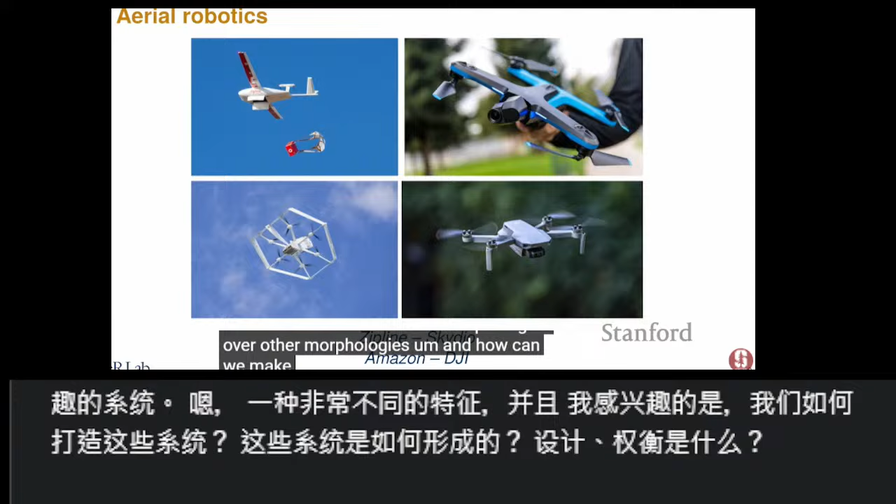A lot of this, of course, comes through, or a lot of the impetus comes from aerial robotics. And we see interesting systems out there that have very different sort of characteristics. What I'm interested in is how do we make these systems? How do these systems come to be? What are the design trade-offs? What are the processes that make us choose certain morphologies over other morphologies? And how can we make this easier for engineers to create interesting systems like this?

So when we're creating such systems, we typically have trade-offs that we are struggling with. So if you want to build an air taxi, you want to be quiet, you want to be autonomous, and you want to be safe, and often these are in tension with one another. So how do you think about creating the systems, and especially how do you create autonomous systems?

Often what we would do as designers is build a system and then pass it on to the next person, and the next person tries to make the system autonomous, design the control loop, etc. What I'm sort of trying to get towards, or at least play with, is how can you simultaneously do mechanical design and controls design in one loop? And especially how do you use, for me, controls theory as a lens towards this? So how do we think about this from a controls theoretic perspective?

My list of slides is long, and what I want to do, hopefully, is talk about two specific challenges, which are sort of problems, and in those problems I want to show three vignettes of different approaches that might solve a particular problem, and then briefly talk about some newer work where we try to close this loop.

And these first two sections will be mostly designs that sprung from some sort of place of inspiration from a designer, and what we want to get away from is having this reliance on the designer's creativity, but something that can automate this.

I don't really know the culture here, but if you have questions, feel free to interrupt me. That's totally fine from my perspective.

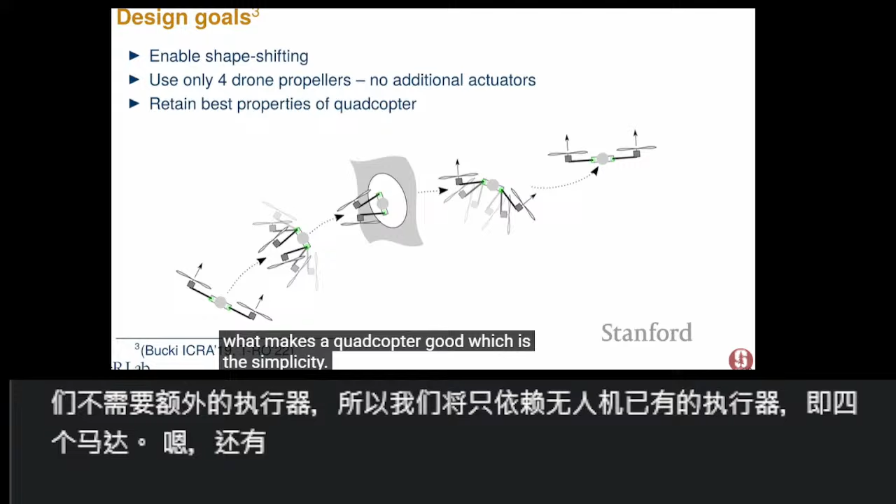The way we ended up doing this, the second iteration, the nicer design, looks like this. We have 4 arms, each with a thruster at the end. The propeller has a hinge that allows it to fold 90 degrees up or down, with a mechanical stop on each end. The propellers are bidirectional, so if you anchored the body, the propeller pushing up would extend the arm.

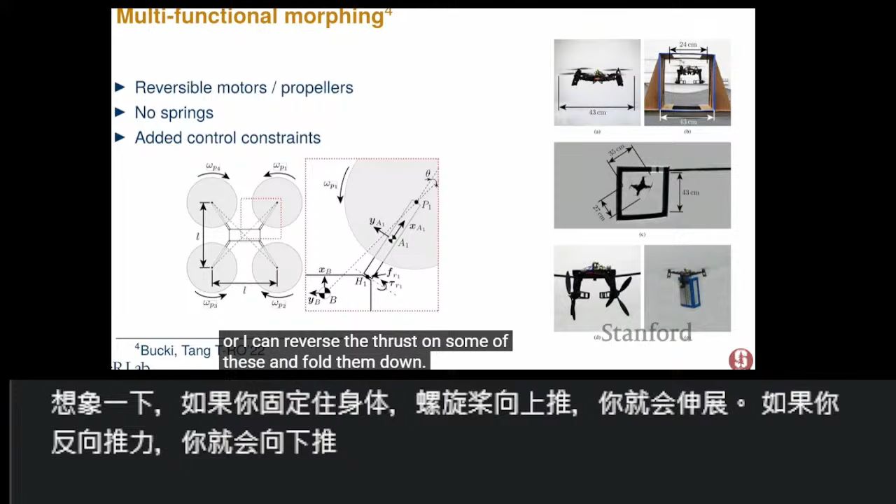If you reverse thrust, you'll push down. In flight it's more complicated because there's no anchoring, but fundamentally I can have all 4 motors deployed straight and fly like a quadcopter, or reverse the thrust on some of them and fold them down. This gives us a system with interesting capabilities.

Here we see the drone take off, fly like a quadcopter, and then fly through this narrow tunnel in this shape-shifted configuration.

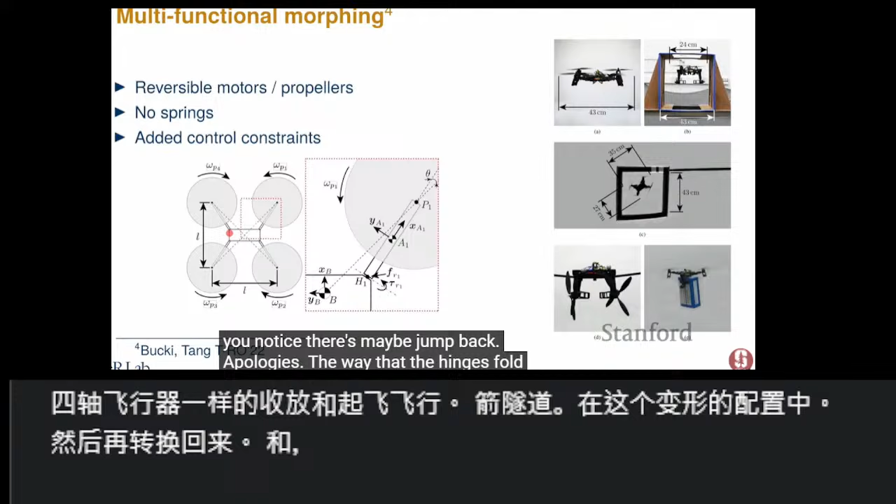And then transition back. You'll notice, apologies, let me jump back. The way the hinges fold is not quite aligned, and this is so that you still have yaw authority, which gives us the ability to hover the system in this reverse configuration.

It is horrendously inefficient in the folded configuration, you wouldn't want to do this for a long time. On one hand, the disk area is much smaller, half the size, so that's a much higher power configuration. But also the yaw torque needed is actually quite high, and the propellers are very inefficient in reverse.

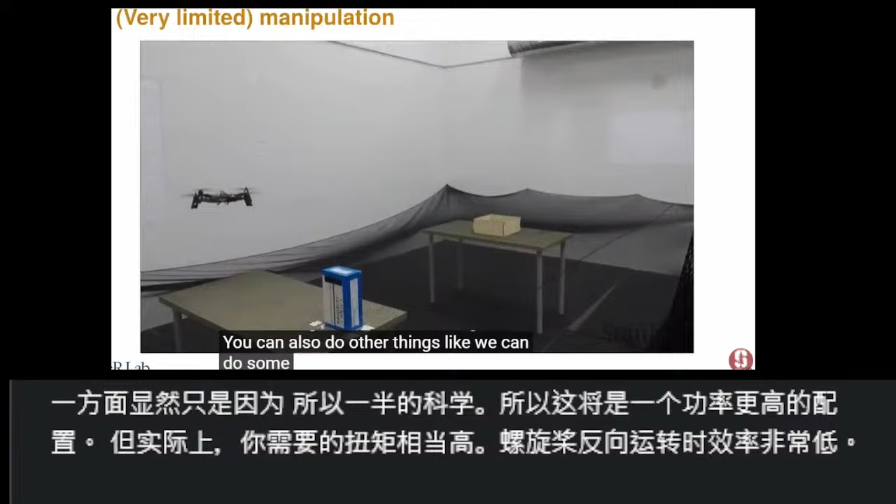But you can do things like these flights, and you can also do other things, like some very limited manipulation. Full disclosure, the box has to be empty because we don't have enough grip nor thrust to carry anything bigger. This is obviously not the design point. We just discovered this sort of by accident.

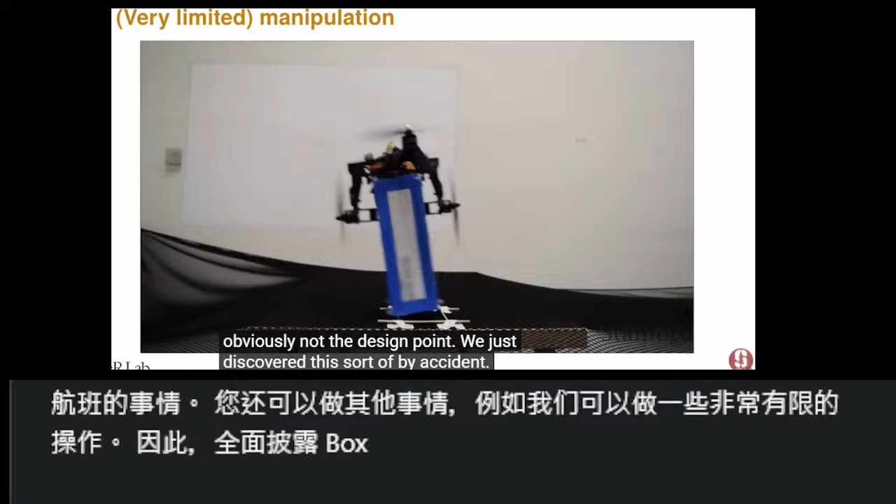But you can use this mechanism for other interesting things. So you can use this to, say, pick up this box, and then you'll notice our position control is not nearly as good when we're carrying the box, but then we can do some very limited manipulation.

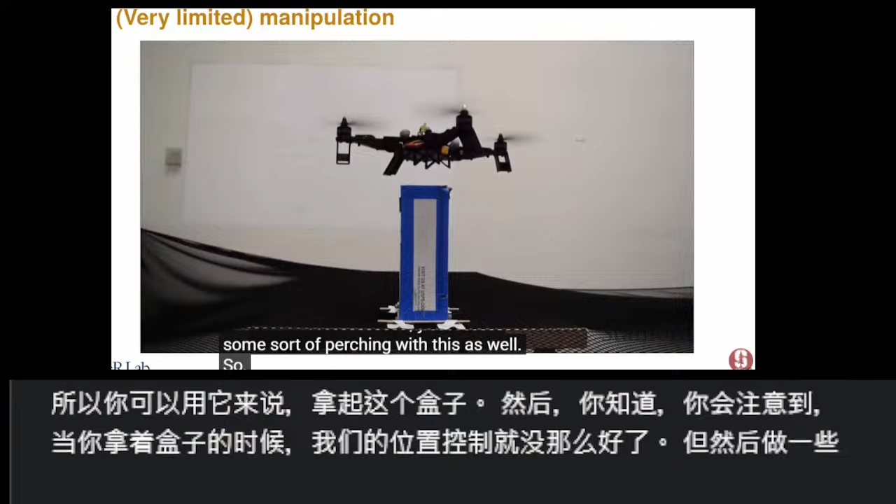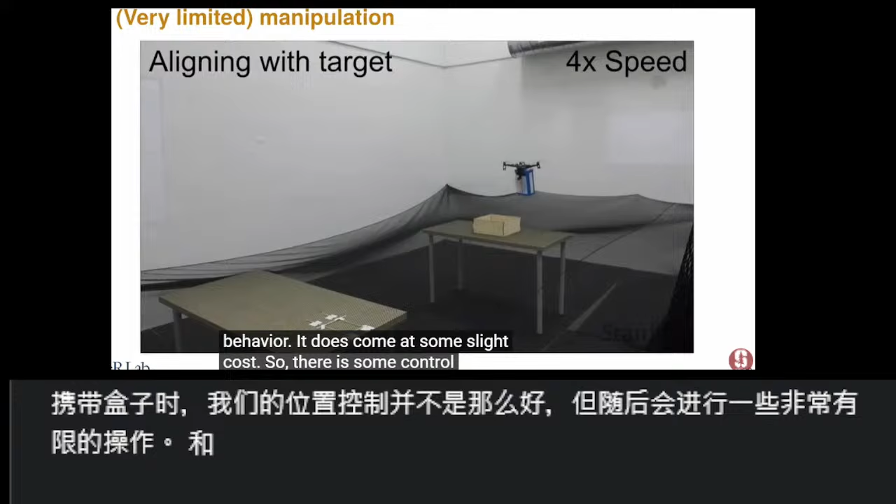You can also do some sort of perching with this as well. So if you land on a wire, and I sadly don't have a video, the four arms fall down and that moves the center of mass below the contact point, so you have a sort of very natural perching behavior. It does come at some slight cost, so there is some control logic you want to be careful about regarding thrust limits, so you don't accidentally fold the system, but that effectively just moves your minimum thrust up slightly.

Okay, so that's morphing, and then the third thing to operate in a dense environment is to cheat and just sort of embrace collisions. So here we were interested, inspired by the DARPA Subterranean Challenge, in creating systems that can really just operate without any sort of knowledge of the environment, so no interest in avoiding collisions necessarily.

This is a tensegrity shape, and I was very happy to see there's a tensegrity sculpture just outside here. A tensegrity shape is something where you have some rigid rods enmeshed in a series of tension elements. What's nice about these structures, as an engineer or a sculptor, they just look cool, but as an engineer, what's nice about these is if you apply an external load, it is distributed internally either as tension in the strings or as compression in the bars, and both of these can be very strong modes.

This is as opposed to a classical quadcopter with an arm - if you hit the end of the arm, there's a big bending moment at the shoulder, which is where you'd have a failure. So what we did is we built a quadcopter in a 6-bar tensegrity that allows us to do very large collisions. We don't need to know anything about the world - we can just sort of crash our way through it.

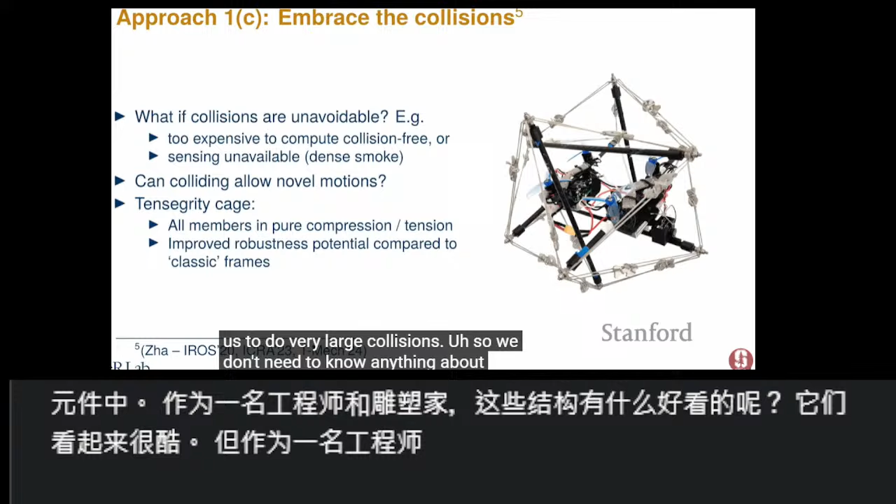To design this, there's all sorts of analysis. This was sort of a cartoon FEM system we created so we could do collisions and try to understand just how the forces would be distributed, to size the robot. But the end result is a system that looks like this.

This is a robot on Berkeley campus. We're not allowed to fly, so this is hopping for the lawyers. This is the robot - its task is to just move forward. It has no external sensors, it just has its IMU, and its task is to move forward through the world. It has no information that it's on a ledge.

So what you'll see here is the robot take off, and then it falls down because it doesn't know where the ground is. It is approximately spherical, so we can use the motor thrusts to orient ourselves more or less upright, and then we can keep moving. We've bashed this thing into our lab concrete wall at like 7 meters per second fairly reliably. At 10 meters per second you can do it a few times, and then eventually something will break. But it's a very robust system.

And what you can also do is motion - this is a robot tasked with moving from this side of the tree to the other side of the tree, again only using its accelerometer and rate gyroscope. It has no information about the world, and what we'll see is it'll crash into the tree. Of course, we can detect a collision with the accelerometer, and we do these hops.

The reason we do the hops is this allows us to do dead reckoning with a fair amount of precision using only the IMU. The logic here is very simple - if you collide with something, hop to the left a meter and then try to go back to where you want it to go. But I want to show here, it's kind of impressive that you can get pretty good dead reckoning from this. And the key here really is the hopping.

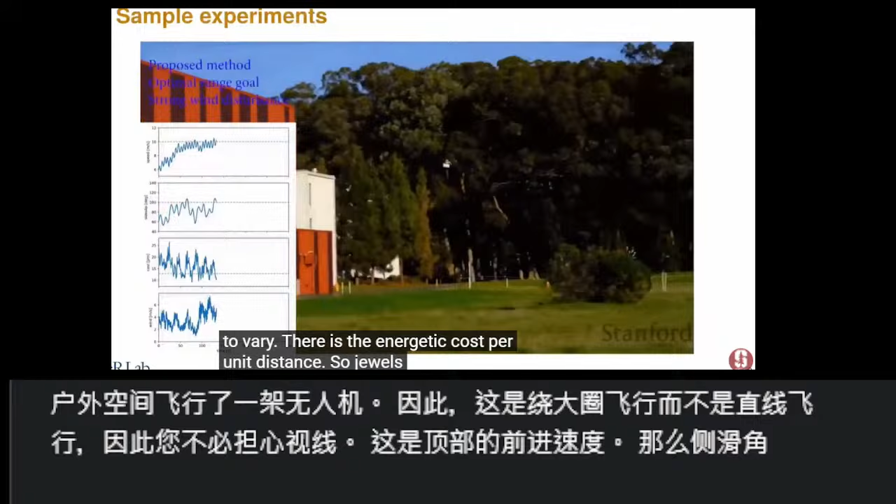We have a graph here that's the forward speed at the top, then the side slip angle, so the 2 degrees of freedom that we get to vary. There is the energetic cost per unit distance, so joules per meter. And then the bottom is just the local wind as we measure it from a base station on the ground.

And what we see here is the speed and the side slip. These dotted lines are things that we just did some offline characterization, and these are approximately where we think the optimal are, but they do converge to this.

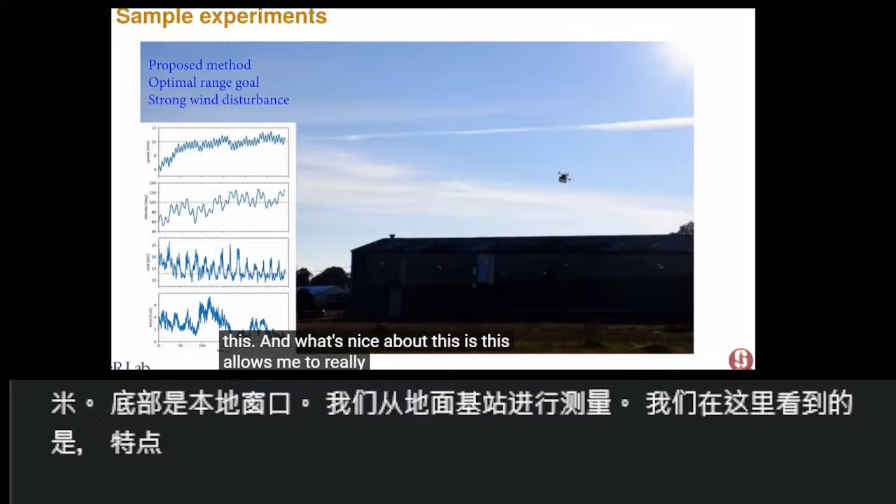And what's nice about this is this allows me to really converge with no other information. I don't need to know anything about the payload. If you give me a different payload today than yesterday, this should also be able to converge.

Then, as I said, we were worried about speed, so we did some adaptation, some modification of this algorithm. Specifically, we as researchers in the 21st century have done a lot of work on stochastic optimization. Some of those ideas you can apply to the extremum seeking controller to make it converge faster. So we played around with that, but the details are probably not so important here. But again, this is just being smarter, right? Taking your system and playing with the algorithms to get more out of the system.

Then again, my heart beats for weird mechanisms. We made a weird mechanism for morphing the system. So if you take a drone, a quadcopter, and you try to fly at high speed, you end up with something that looks like this.

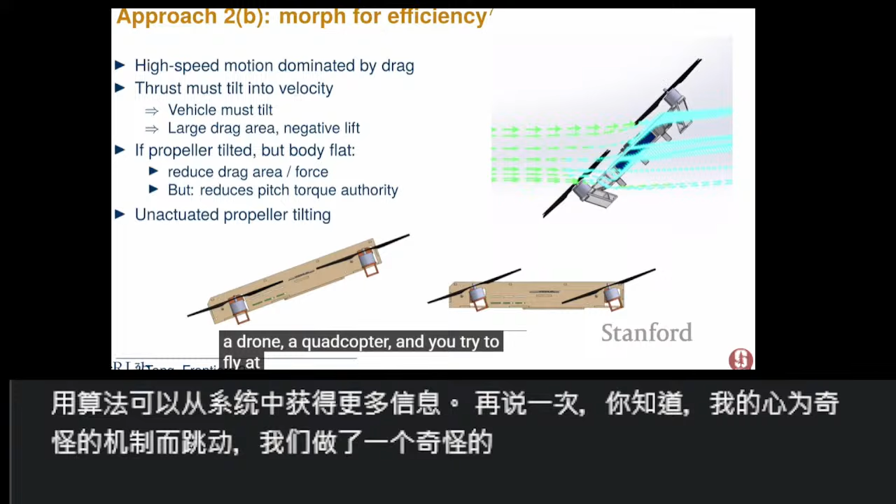So this is very cartoon level CFD. But you have the drone, you have to produce your thrust forward, and then you have the drag of the system that you need to overcome. As you try to fly faster, you're basically increasing that surface area, so you have more drag, which means much less efficiency.

And ironically, the system tends to act like a wing pointing downwards, so you actually have negative lift that you also need to compensate. So if I could tilt the propellers without tilting the body, I could get the forward thrust without this additional drag. So we worked on a system where I can tilt the propellers, but again, do this without actuation.

So I only want to use the 4 motors. The 4 motors I have to have anyway, but get the system that can operate in these 2 different configurations.

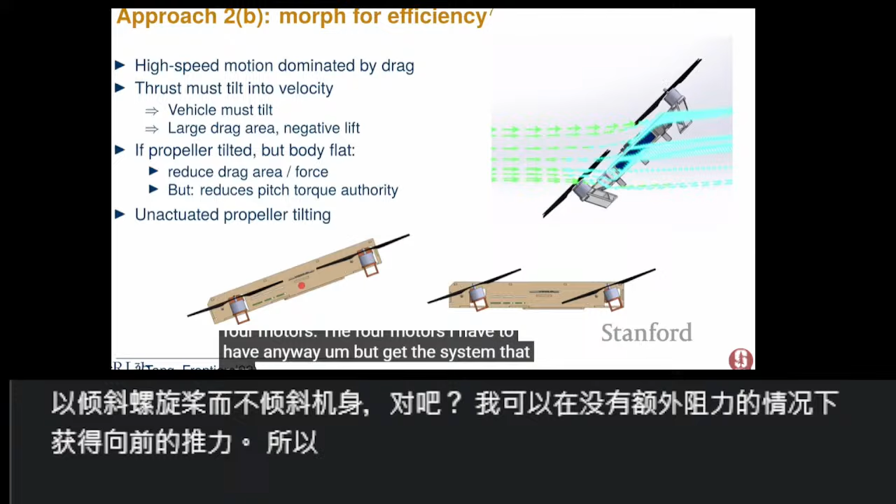The way we did this is with a sprung mechanism where all 4 of the propellers have 1 internal degree of freedom, so they all move together. There is an internal hinge and a spring attaching the propeller to the body.

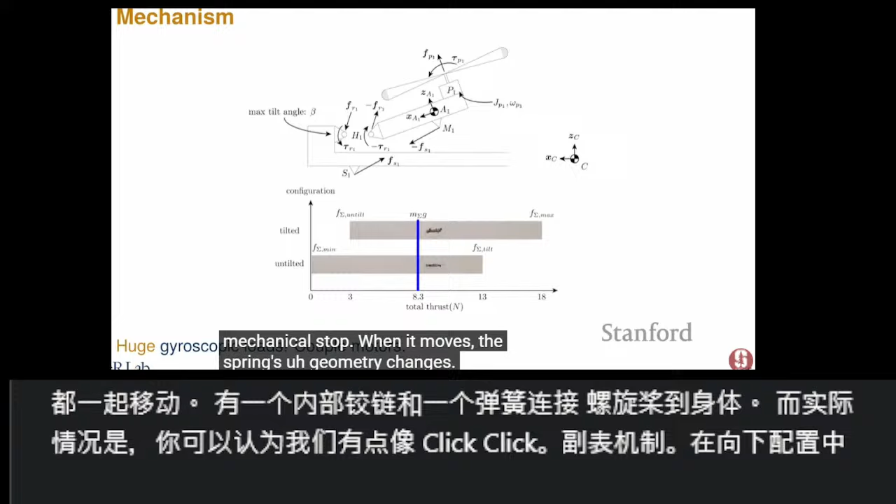And what happens is, you can think of it as a click-click bistable mechanism where in the downward configuration, there is a certain maximum amount of thrust where you would overcome the spring's restoring force. You would have this thing buckle up. It will hit some mechanical stop. When it moves, the spring's geometry changes, so that restoring force changes. And then to get it to go back, you need a much lower minimum force.

So what this gives us is this graph here, showing with the 2 configurations, tilted forward versus perpendicular untilted configuration, the thrust I can produce without tilting. If I'm in the untilted configuration, I can produce down to 0 thrust, of course, and then there's a maximum thrust beyond which this thing will tilt. Once I have reached the tilted configuration, I have the top range of feasible thrust forces, and if I exceed this minimum force, then I will tilt or switch back to the original configuration.

And what's nice about this is we can hover in either configuration. So the blue solid line here is the hover thrust, so you can have this vehicle hover in either configuration. What does this look like? This is the vehicle flying outdoors. Doing that switch here is in our lab, doing this switch.

Of course, not particularly useful if all you're trying to do is hover, but just for motivation, the untilted configuration is nice. Why not always tilt? The untilted configuration is good because you have larger moment arms. So at low speeds, you are more maneuverable with perpendicular propellers, but of course, you just have higher drag. But what this gives us is much higher maximum speed, for example.

So here we have the system with the tilted configuration on the right and the untilted configuration on the left, and we can achieve sort of a 12% faster flight. I forget what the efficiency number is at the same speed. You can also show something like 10-15% decrease in energy that you require while flying.

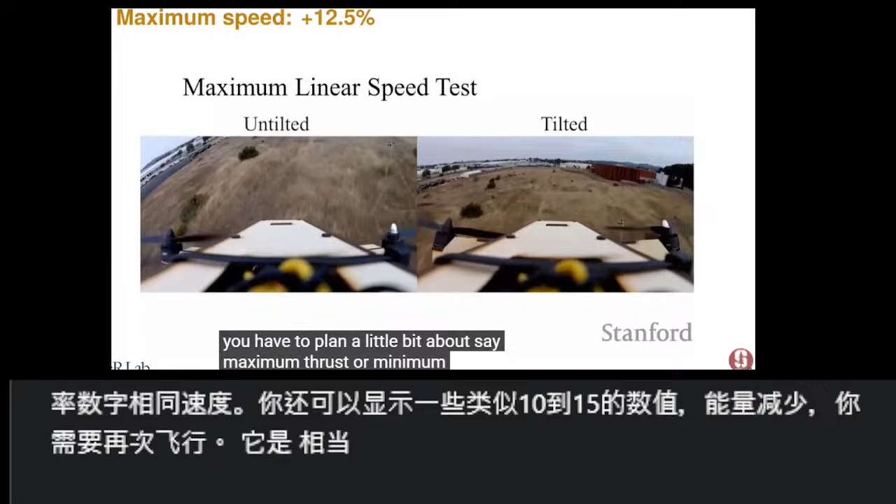Again, it's not quite for free because there is some thrust limit you have now. So when you are flying, you have to plan a little bit about, say, maximum thrust or minimum thrust so you don't accidentally switch configuration between these two configurations.

And then lastly, on this topic of efficiency, how can we cheat the problem? So again, I want to fly a long time. Let's just think about changing the problem so that this is easy to do.

So if you think about this powertrain that I've described, if you think about how the propellers interact with the air, a simple model of this is what's called the actuator disk model. This is almost cartoonishly naive. When you first learn about it, you model the propeller as sort of this magic disk that just adds energy to the flow. Nothing is rotating, but it's surprisingly predictive.

And if you do the math for this, you come up with this power relationship. So the power that I require for a propeller will be proportional to the force to the power 1.5, and inversely proportional to the radius of the propeller. This is for a stationary propeller, but this gives me a predictive way to guesstimate how the power requirement will change if you change the mass, or if you change the size. This gives you some idea of how to do this.

And from this, of course, you learn that, okay, if I want to do long duration flights, I either want to have a lot of energy or low power. I can reduce the power by increasing the size of the propellers or reducing the amount of force I need per propeller. I can also, of course, change the amount of energy I store.

So this graph here says, okay, let's take a drone, say it has unit mass without battery, and then change the amount of battery that I carry. Cartoonishly, I'm going to allow it to carry an arbitrary amount of battery. So on the x-axis, we see the battery or the total mass with unit 1 mass, meaning 0 additional battery, and then more and more battery. And on the y-axis, we have the flight time that this thing can fly.

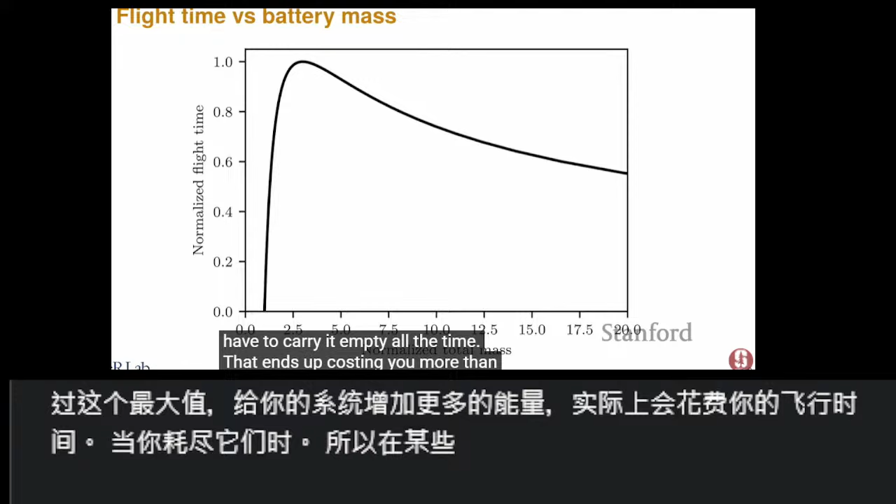And of course, if I have no battery, I can't fly. Not surprising. As I have more and more battery, I can fly longer and longer. And then there's some maximum beyond which adding more energy to your system actually costs you flight time. Why is this? Well, loosely because batteries don't get lighter as you deplete them. So at some point, the cost of carrying that additional energy, you have to carry it empty all the time. That ends up costing you more than it gains. So there's some fundamental limit to how long you can fly, no matter how efficiently you design your system.

And that's unless you cheat. So the way we cheated is with what we called flying batteries. The idea is I have my main system that I want to have do something useful, and then I have a small system that just brings it more energy, right? And what this gives me is a robot that can fly potentially arbitrarily long.

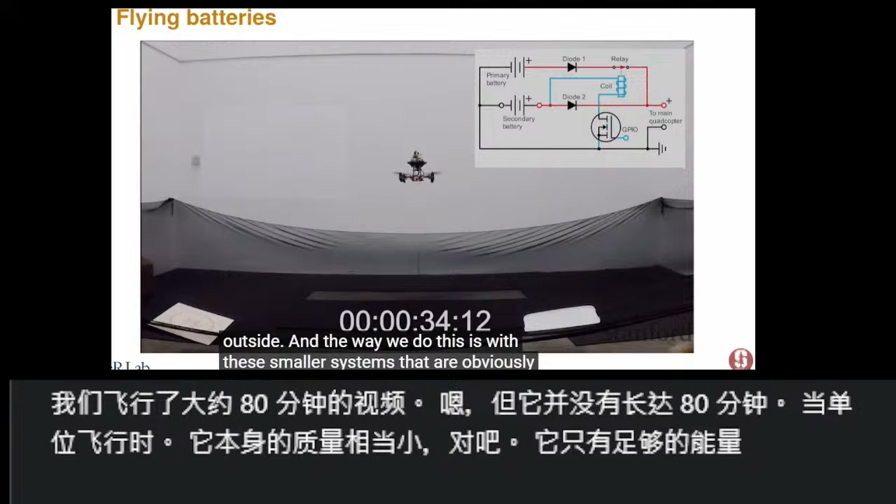So I'm going to show you here a video where we flew for around 80 minutes. It's not 80 minutes long though, where we can have this main unit fly. It has itself a fairly low mass, right? It only has enough energy for effectively taking off and landing, but we can bring additional energy to it from outside. The way we do this is with these smaller systems that are obviously carrying a much larger battery than they themselves need. And then, up here, there's some circuitry to make sure you don't set fire to the drone and so on as you connect these batteries.

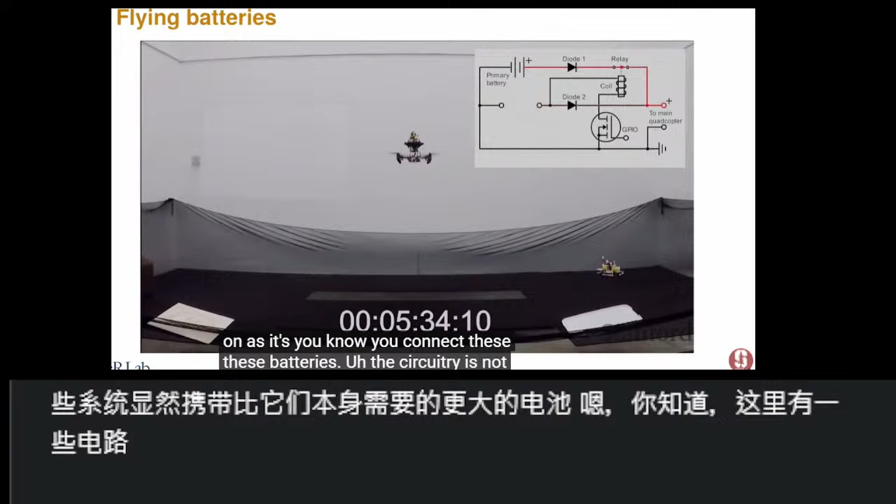The circuitry is not that sophisticated. It's effectively some diodes, which just mean one-way current flow. But here you see this maneuver where we then have the battery come in and out. And what we can now do is we can fly effectively indefinitely with the main system.

And if you're doing something like an air taxi, this might be one way to get around the problem of how do I make a system that is light enough and small enough that it can land safely in crowded environments, but still have useful range. Well, just bring the range as you're moving, right? So you don't need to carry everything with you.

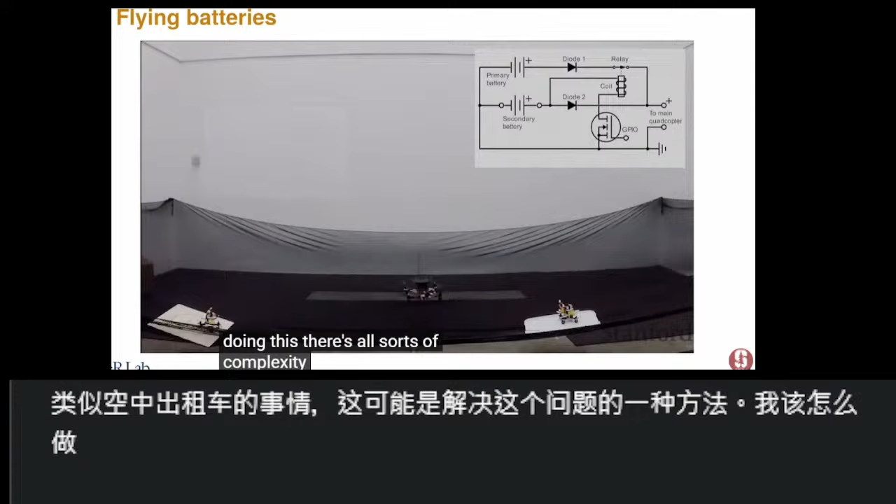So with all of this, how do we go about automating this design process? Each of these problems I've shown you, these different approaches, effectively come from some spark of inspiration, right? You have some idea of why don't we try folding the arms or something like this. And how do I automate this problem? How do I go about giving a designer a tool where maybe you do more of a high-level sketch of the problem and it then gives you some possible designs?

I think we'll never get to the point of automatic design, because at the end of the day the design space is always too complex and our value functions are always too vague that you can never meaningfully automate the whole system. But what I'd like to have is something that gives me a rough idea that's in the feasible space, that is then for me to interrogate. So I can take this and play with it and see how well it might fit my particular problem. So I want to talk about three ideas, depending on time, about how this plays out. Now, we've done nothing in terms of solving the actual problem, but sort of go in this direction.

The first will be on designing a closed loop, or doing closed loop co-design, then learning from simulation, and lastly, synthesizing interpretable policies which, if you'll humor me, hopefully fit into this bigger problem.

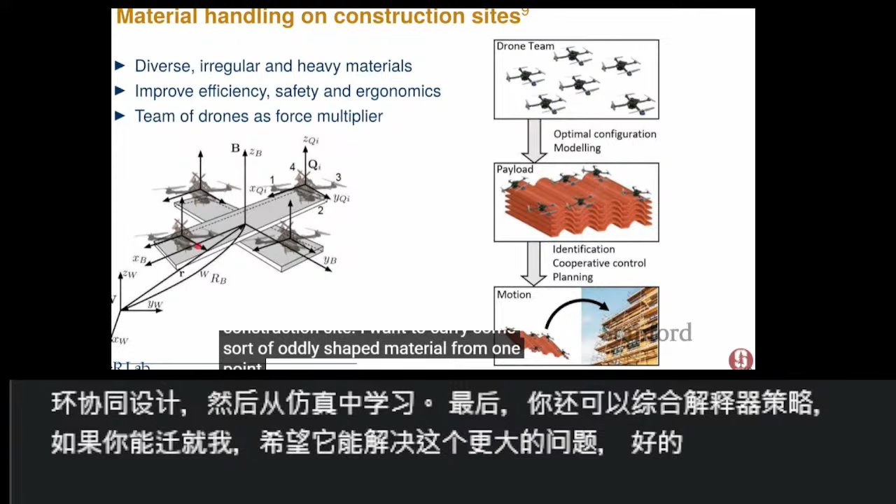Okay, so the closed loop co-design is motivated by a fairly mundane material handling problem. Maybe I'm on a construction site, I want to carry some oddly shaped material from one point to another on this site. I'm going to assume I have access to a bunch of lifting units, drones effectively, that I can somehow attach to the material I want to carry. And then I want these things to bring my material somewhere that I want to go. And of course these are drones, so I can't replace the crane because I can't pick up really heavy things, but I can potentially help by moving some lighter things from point A to point B.

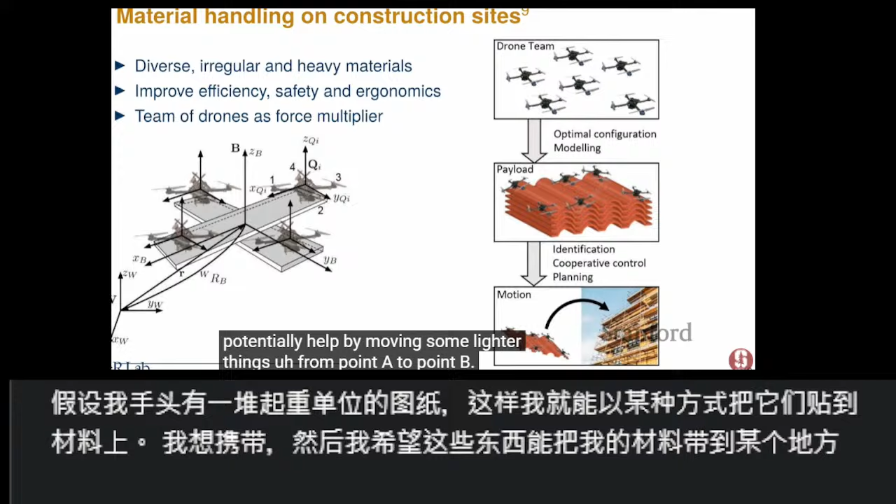Now, if I am doing this, we're going to assume that the payload I'm moving, I know its characteristics - I know the geometry of the payload, I know its mass characteristics, and I am able to attach my lifting units somewhere on the perimeter of the object. And what I'm going to search for is where should I attach these lifting units on this object so that I have robust performance. Robust performance for us, I'll define in a second, but just loosely: if I want to carry this particular weird box, where should I put these things so it gets there even when there are disturbances?

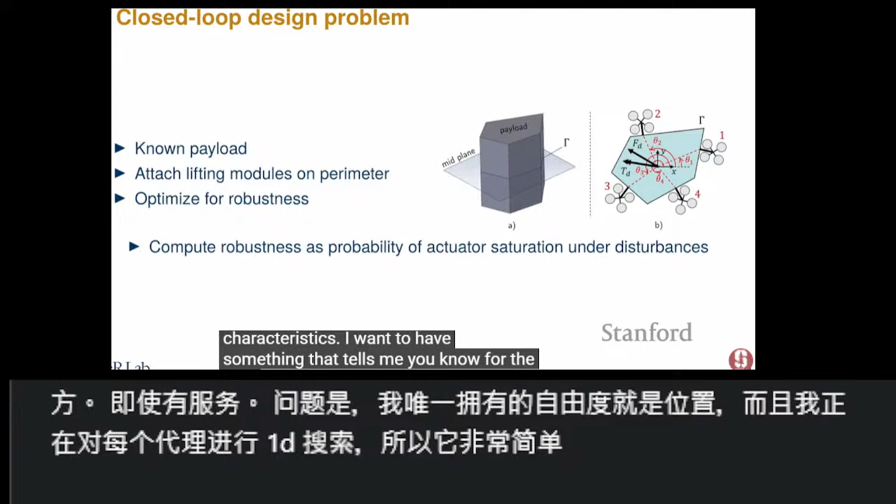It's sort of a cartoon of a drone design problem where the only thing I have, the degrees of freedom I'm playing with, is the location, and I'm doing this on a 1D search for each agent, so it's a very simplified controls problem. But I want to do this in closed loop, so I don't want to design some open loop characteristics - I want to have something that tells me, for the best controller, this is the best performance you're going to get.

Our control objective we frame as follows: we say that a robust system will be one that has least probability of actuator saturation. So you can imagine as there are disturbances, your thrust forces will vary, and I want to keep those thrust forces as far away as possible - I want to reduce the likelihood of them hitting either the minimum or the maximum bound. The thrust force I have in closed loop, of course, consists of two things: there's the static feed-forward term, just the hover thrust that I require to keep this thing flying, and then there's the feedback term, which is in response to disturbances.

So what we do is we model our system and linearize it, and we assume that the disturbances are Gaussian. The disturbances here are force and torque disturbances acting on the system. Then we do an H2 approach to calculate the statistics of the inputs. Then we calculate this Mahalanobis distance, which is a bit of a kludge, to approximate the amount of probability mass that we have within the feasible range.

So we're not actually solving the problem exactly, notice how I'm breaking it into approximations. But using this, we can calculate for certain configurations, at least with this Mahalanobis distance, what is the smallest number of standard deviations in the multidimensional sense that I am away from a saturation of my actuators. As you have different designs, you can calculate this. This is fairly cheap to calculate, not milliseconds, but we can solve it in seconds for a configuration.

And it's offline, so you're not doing this in flight. Seconds is fine, but we've not optimized it beyond that. You can then figure out where is the optimal configuration.

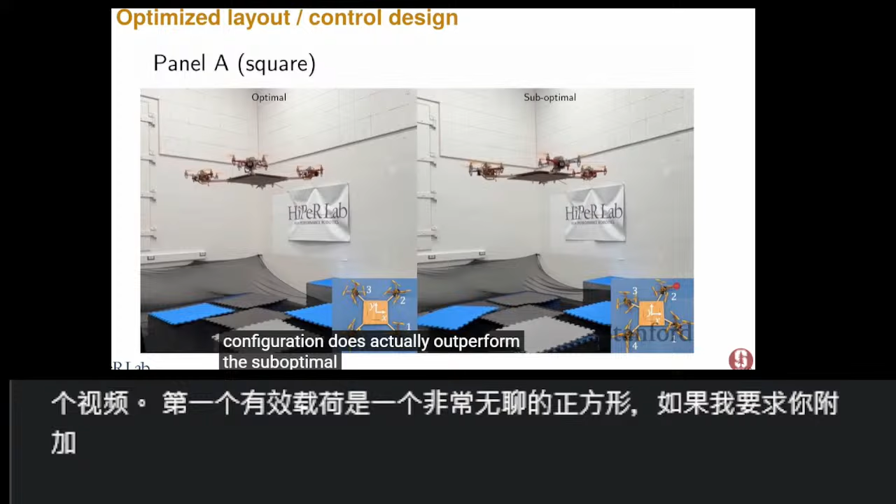This video is just supposed to show, we predict some difference in performance, and we can measure that difference in performance as well. The optimal configuration does actually outperform the suboptimal configuration, even when it's, in this case, probably not particularly useful to have heavy machinery to solve this problem.

But we also had this payload here, which I think is more interesting. This payload looks more or less like an L. We are going to attach three agents to it. If you had asked me, I would have guessed this configuration on the right, the symmetric configuration.

But if you run our tool, it spits out the configuration on the left. It is a locally optimal configuration. This problem certainly is not convex—you can imagine you have permutations, so there's no unique solution anyway. But this is a locally optimal solution that is more robust.

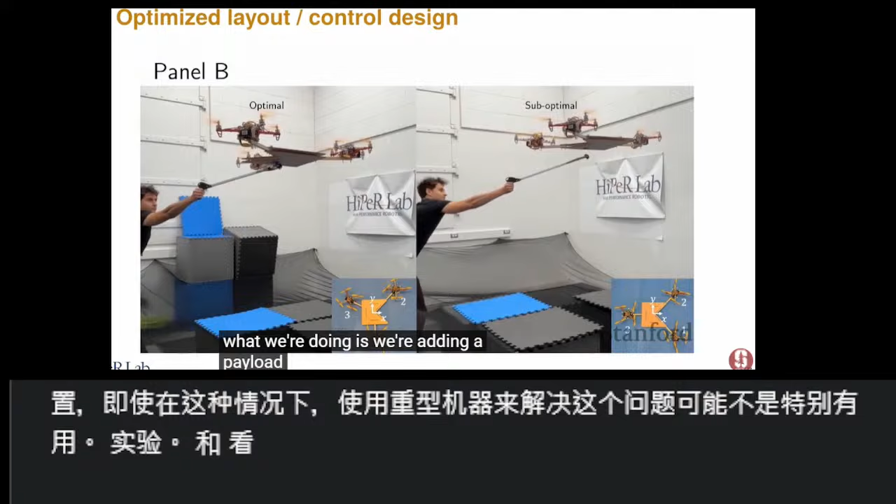And we can do experiments and see that. So here we have these things hovering, and what we're doing is adding a payload disturbance to it. And you can see how much better the system responds to that.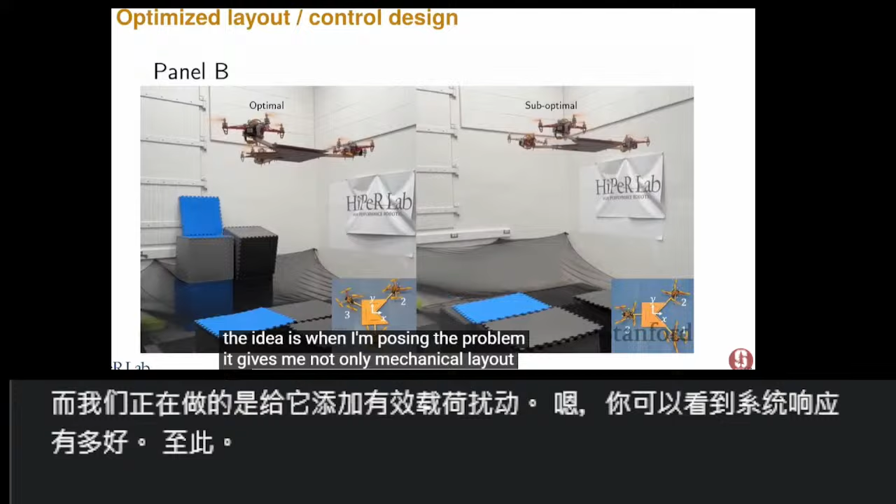Again, the idea is when I'm posing the problem, it gives me not only the mechanical layout, but implicitly through the H2 control analysis, it also gives me the feedback controller gain that you should fly with. Okay, so that's one thing, and this we can do for simple problems where we can linearize and use all of these great tools from linear control.

If you want to go beyond this, it's hard. For systems where we do complex maneuvers where the nonlinearity matters, I don't know how we would solve these kinds of problems except with very large-scale Monte Carlo, which would be slow.

So one of the things that's not quite in the design space yet is: if you give me a weird design, can I come up with a good controller for it without the designer having to sit down and do that controls design? And of course, a lot of our learning techniques go to this.

So I gave Daisy, the student who worked on this particular subproblem, the challenge of designing a controller that will carry different payloads smoothly—I don't want to tell you what the masses are, just adapt to different payloads as you're flying. But then we quickly realized that's pretty easy, and we pushed this further.

The cartoon problem now is: design me a controller that can fly any quadcopter. Give me a little chip that I can hot glue onto your drone, attach the motors to it, and it'll fly. I do need to know that the motors are symmetric, so it looks like an X, and I need to know which direction is forward and the IDs of the motors, but I don't need to know the size of the system, I don't need to know any mass properties, I don't need to know the speeds of the motors.

I am just giving the motors some sort of black box command, and I have access to IMU data and my actions. And from this, I want to fly this quadcopter.

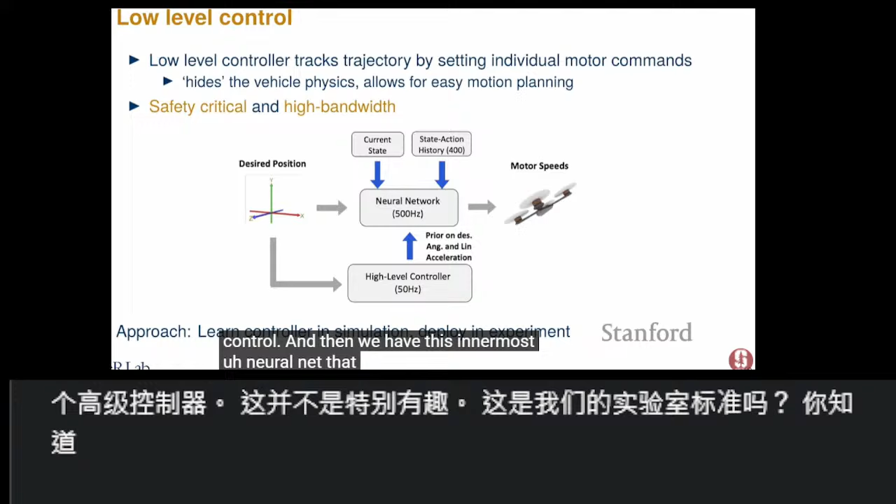And then we have this innermost neural net that does the tracking and hides the physics. We learn this controller. We base this off of the RMA architecture that I think was especially popularized by Jitendra Malik's group, when they were doing legged robots.

The idea is you have something that looks a lot like indirect adaptive control, where you have a low-level controller that has as input some sort of parameters that are a function of observations. Your low-level controller in indirect adaptive control is typically an LQR controller that's parameterized by, say, mass parameters, and you have an extended Kalman filter which estimates the mass parameters as you're operating.

Here, none of this is model-based. It's all black box neural nets. So we have our low-level controller, and we have what we call an extrinsics encoder.

The extrinsics encoder is trained in two phases. In the first phase in simulation, we train a low-level controller that is parameterized by these extrinsics. The extrinsics come from an extrinsics encoder that in the first phase has access to the true parameters in simulation, so the true mass parameters, the true size parameters, the true propeller coefficients, things like this.

In the second phase, we freeze the low-level controller and we just learn an adaptation module that now has access only to the sensor and commands from the system, so something you can actually causally implement. Then you learn this to generate extrinsics, which make the system work well. And then you deploy these statically in experiment.

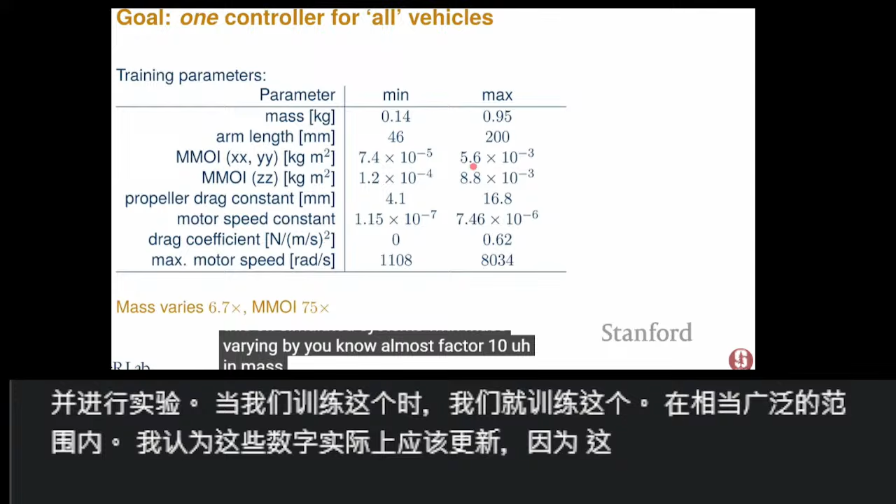When we train this, we do it over a fairly broad range. I think these numbers I should update since the newer publication was just accepted, but we train this on simulated systems with mass varying by almost a factor of 10, and mass moments of inertia varying by 2 orders of magnitude, things like this.

And then we deployed in experiment, and unfortunately I only have 2 sort of typical robots that work well in our lab. So here is just a boring video of these 2 drones flying left and right using this controller. These are not particularly present in the training data, but of course they fit in that range in which we were training. We see here these 2 systems fly stably back and forth.

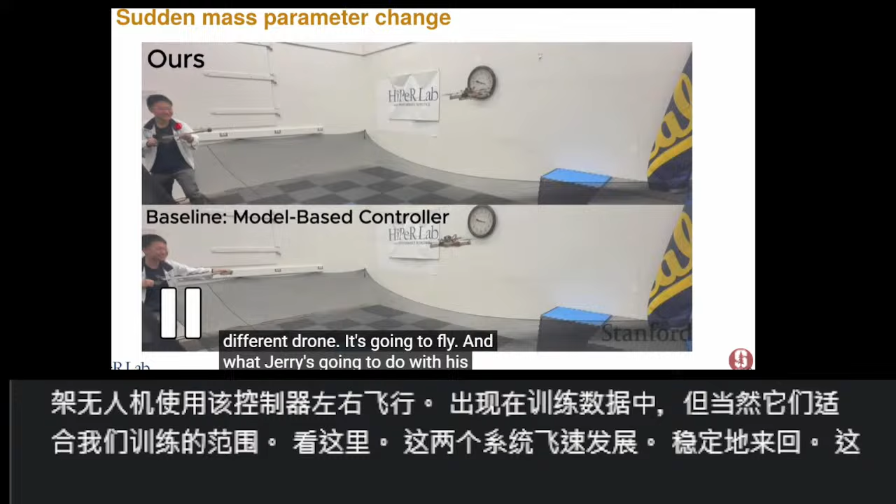What's nice about this is you can really mess with the system. So here, what we're going to do is we're going to have the system flying. This is a slightly different drone. It's going to fly, and what Jerry is going to do, you can see how much glee he gets from messing with the drone. He's going to add a large payload as it is trying to fly the circle.

At the top is the learning controller. At the bottom is our lab standard controller with an integral term just to eventually get rid of that mass offset. And we notice how the learning controller, it's to me, it was shockingly robust to these perturbations.

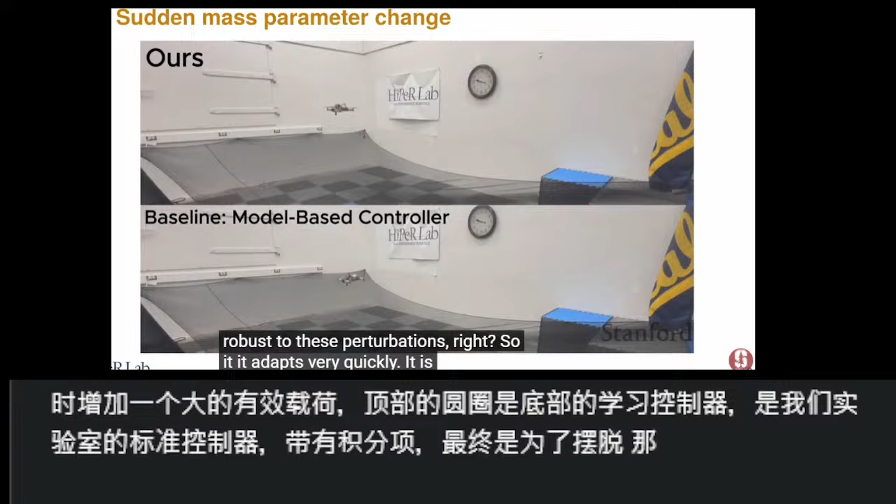So it adapts very quickly, it is very robust. If you were to just hover, our lab's model-based controller that's tuned for the system will do better than the learning controller in terms of RMSE and noise rejection. But for these sort of adaptations, it is pretty incredible. I shouldn't say that so strongly - obviously I love my own children, and I think my research is incredible. But I was really shocked at how well the learning worked for this.

Why this is interesting to me is it gives me this idea: if I want to create a weird vehicle, maybe all I need to do is zip tie it together, put this controller on it, and see how it works. Now, this controller is probably not the best controller. If you sat down and measured the parameters, you'd probably come up with something better, but it's a reasonable controller, right? It gives you some idea of what's possible with your system. So as a designer, if you want to iterate on ideas, this might be a way of being able to do that faster, evaluating your ideas more straightforward.

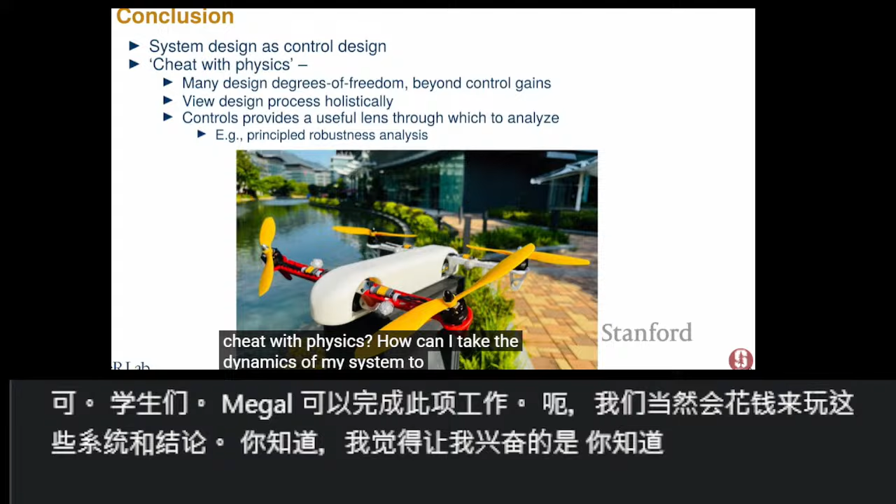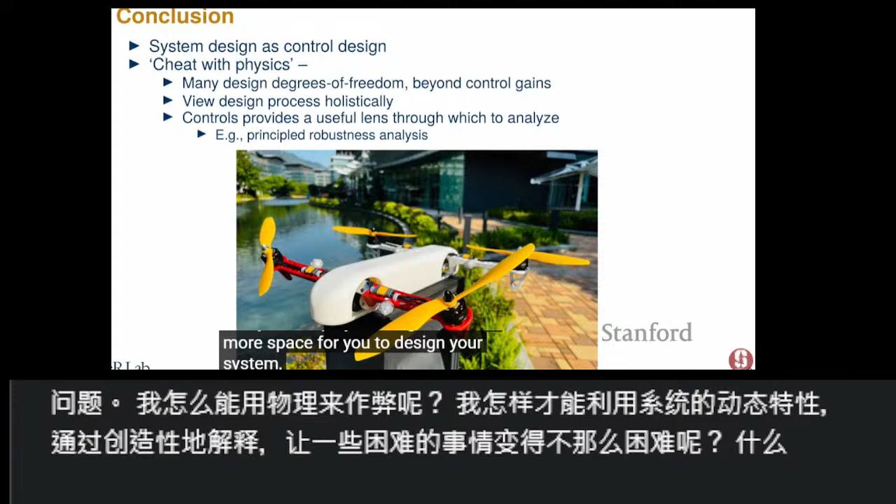In conclusion, what I get excited about is that system design is control design, using control as a lens to think about these problems. The other thing I always try to think about is how can I cheat with physics, how can I take the dynamics of my system to make something hard less hard by being creative in how you interpret your degrees of freedom. And especially if you think of mechanical design as part of this, not just the controls gain, not just the algorithms, but the mechanical design as well, you just have more knobs to play with. There's more space for you to design your system, which potentially gives you better solutions.

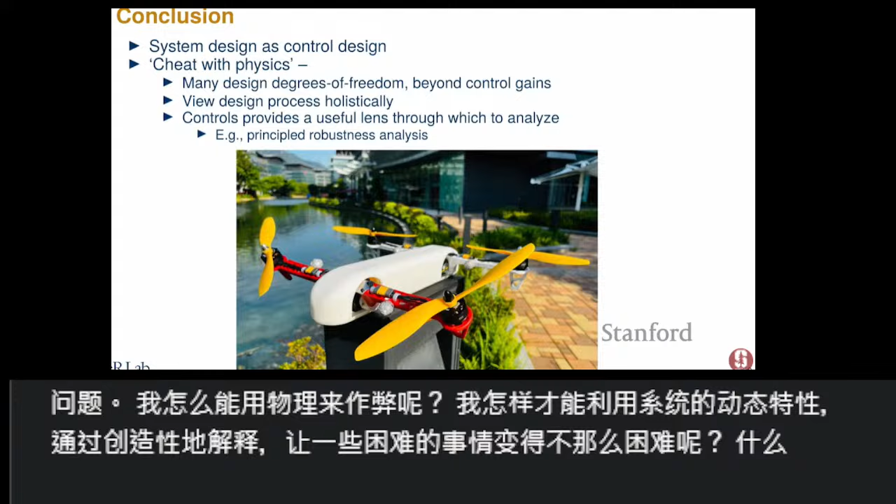Nice talk. On the LLM part, I was curious if the LLM is just doing this genetic combination, or is it actually using any of its reasoning capability as well? Because the case you mentioned where you have some impossible logical cases, I feel like an LLM would be pretty good at just reasoning about that and getting rid of those things.

Yeah, I thought I'd have less time, so I didn't put the details here. The way we do this is you can think of it as a standard genetic algorithm. Typically when we do a genetic algorithm, you have a finite dimensional search space, maybe 10 dimensions you're searching over, each a real number. You have some cost function you can evaluate, and then a process by which you take two possible values and generate a child from them, typically a simple average or something like this, and then you evaluate these. In this way, you can search through your high dimensional space.

The space of code is, of course, somehow infinite dimensional, so you can't do this naively. What we do is the cost function evaluation is: you give me the controller and I just run it in my simulation, and see if you succeed or not. With the LLM, we tell it, in broad strokes, this is the problem you're trying to solve, here are the inputs, here's the output, here are two programs that solve this problem, generate a new program that is better.

And better is, I don't know, what does any of this mean at the end of the day? It's a statistical model that has no understanding of anything. But what it does, and then there's the hyperparameter of the temperature of the LLM, like how much randomness does it add.

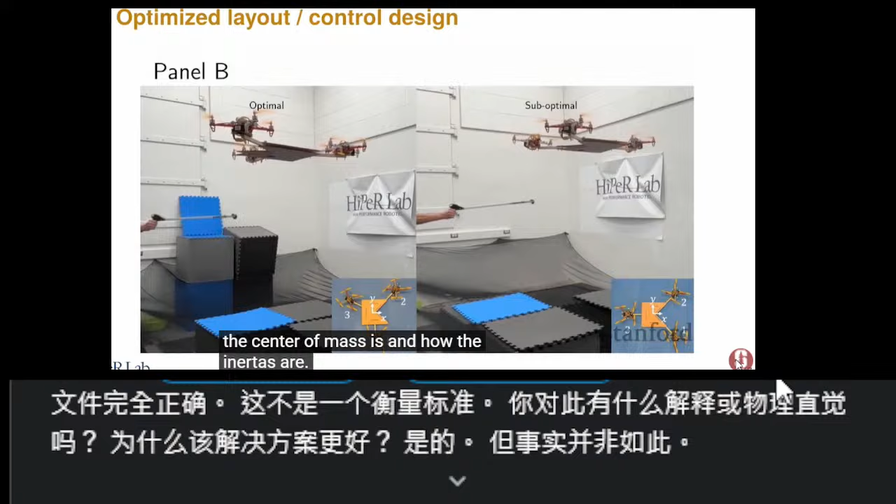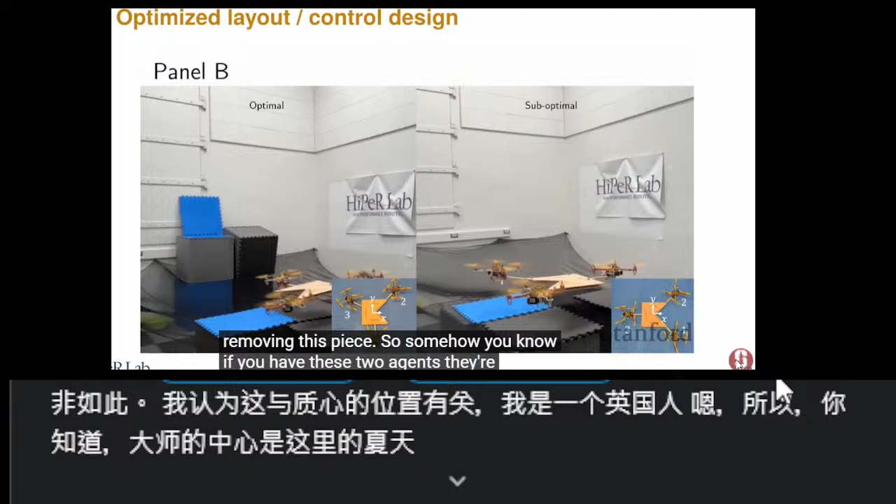Yes, by which I mean not really. I think it has to do with where the center of mass is and how the inertias are. Here the center of mass is somewhere over here, because you're removing this piece. So somehow, with these two agents being much farther from the center of mass than the third one, in this configuration everyone is, in the open loop sense, the open loop forces will be smaller. It's some combination of the open loop and closed loop, and I think both the controllability aspect and the open loop forces will be more favorable in this configuration than in the right-hand configuration.

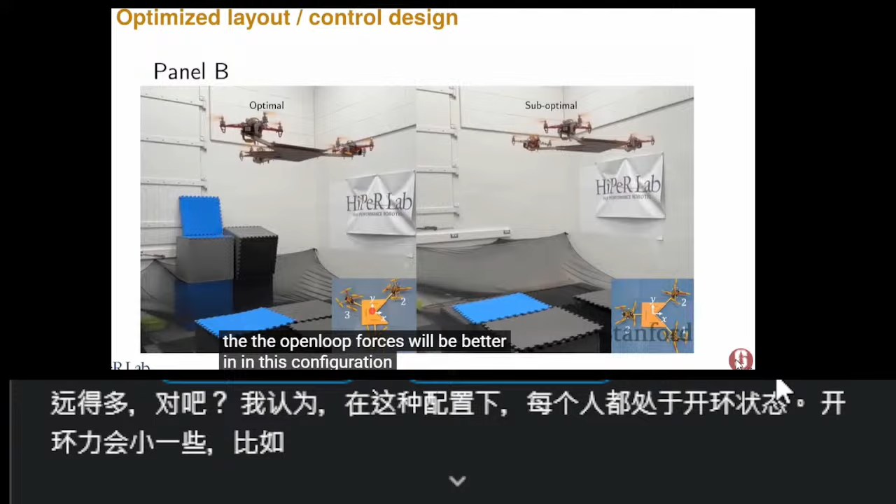One of the early works you were talking about generating trajectories where you're sure you can stop by the time you hit an obstacle. I think this is common in a lot of robotics problems, whether it's a small robot on the ground, you make this assumption that you can stop. But I'm wondering, when considering higher level co-design for aerial systems, like a fixed wing system, or even a car on the highway, where immediately stopping is maybe not a feasible solution, would you consider safe trajectory being a deviation trajectory or something like that?

Yeah, that's an interesting question. If you have a system where either stopping is not an option, like a fixed-wing aircraft where if I stop I fall out of the sky, or where stopping is not safe, like if I'm driving on the highway and stopping is dangerous, I think the question to ask then is what is safe.

For us, we want to have the property of recursive safety: if I start from a safe condition, I remain safe, at least under assumption. We assume you can track the trajectory fairly well, that your perception system perceives the obstacles, that the world isn't moving, things like this. But at least under those conditions, as long as I start safe, I should remain safe during my motion.

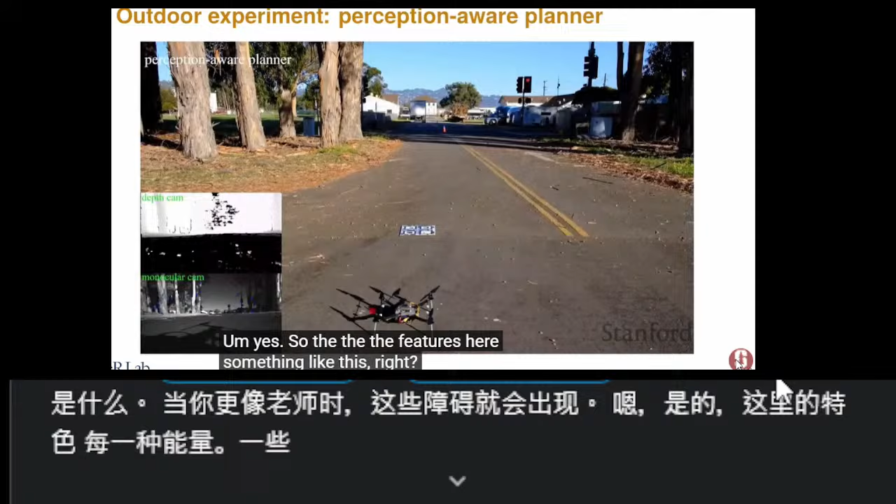So then the trade-off that you do is speed towards the goal: how much progress do I make versus the uncertainty that you accumulate as you move. But for both of those, collision-free is a necessary condition before you'd even consider the cost.

I don't know how much time we have. I see another hand, it's okay.

I think it's sort of a follow-up from the previous question, where you're assuming that your depth map is accurate and the goal and the world around you is stationary. How would that be different if, say, you were to carry out precision landing on a goal position in a dynamic setting, where the goal is moving on a moving platform? Something that also ties to how you were mounting another drone on the previous drone.

Yeah, so that becomes really difficult. If your world is dynamic, or if your objective is somehow dynamic, I think you need a step change in complexity. Probably you need to segment the world and try to isolate the things that are moving from not moving, so that you can say these features are attached to the stationary part of the world, and I can plan with those and so on. We have not thought about that, so I don't have a good answer except that high-level response.